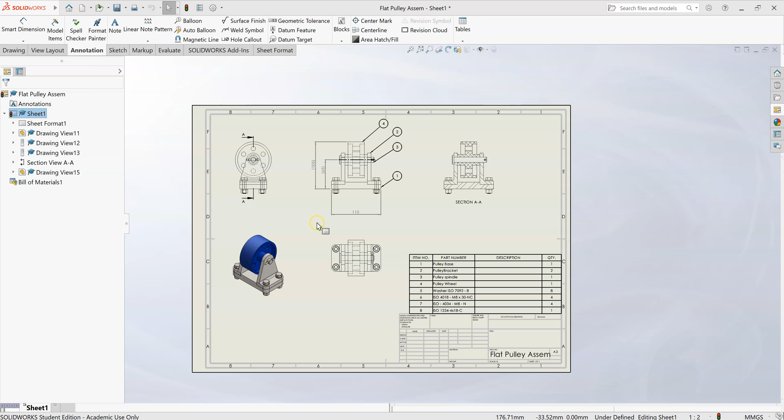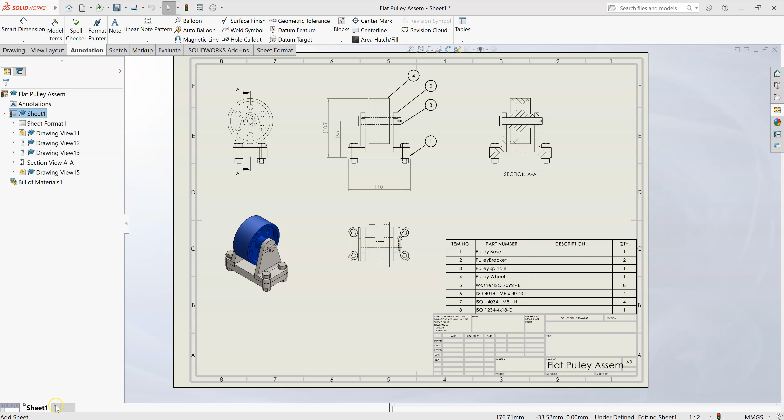So in this video I'm going to create a new drawing sheet within the same drawing file. This time I'm going to do a single one of the parts here. So let's say, for example, the pulley base, if we take them in order. So down at the bottom here I'm going to click on create a new sheet.

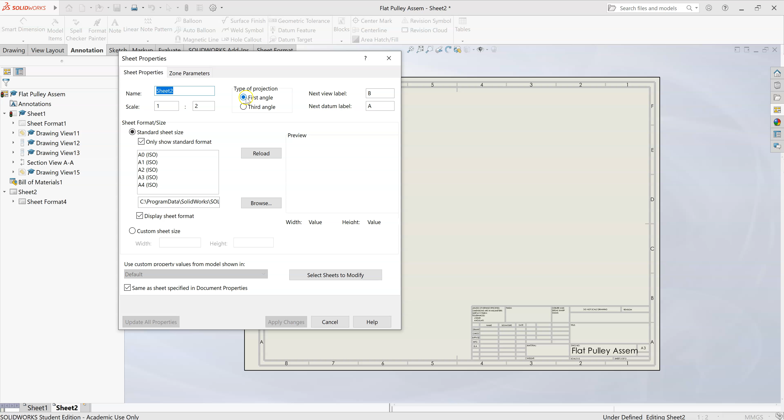Okay, it opens up a new blank sheet with the same format and same properties as sheet 1. So it'll take whatever the properties you set up for sheet 1 and create a new copy of that essentially. So if we right click here, we can look at the sheet properties. See, it's using the same template as before, and it's still in first angle projection because we set that last time.

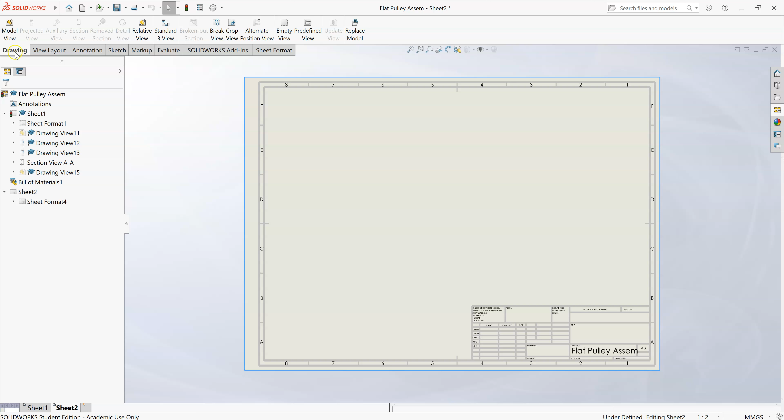Okay, so in this sheet here, what I'm going to do is I'm going to import three views of a particular part. So if I go back to the drawing tab back here, same basic procedure that we used before. I can import a model view of an existing part, so the pulley base, spindle, wheel or bracket, and I can import a single view and then project views from that.

Or alternatively, I could come across here to the right hand side and go to View Palette. I need to refresh that. And here it's still looking at the same model, the assembly model that I had before, so I can change that. This little drop down here, I can go to Pulley Base, for example. And we have my front view, top view, right view, etc. So I could drag a particular view from that onto the sheet and project from there.

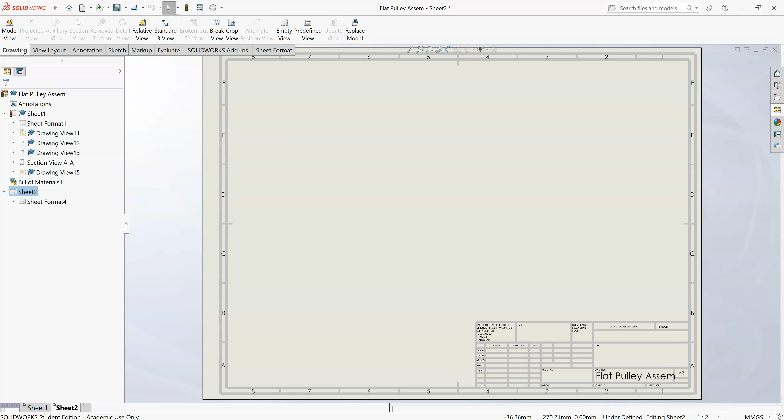Okay. But I'm just going to cancel out of that for the moment. So on the drawing tab here, if I go to the standard 3 view, that should take, depending on how I've created my model, that should give me a plan, elevation and end view of my part.

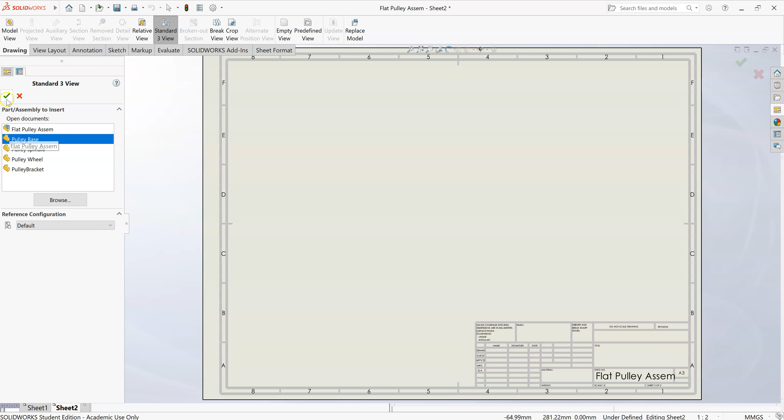So standard 3 view of that part, and click OK, and it's put in a plan, elevation and end view of that pulley part in first angle projection. So this is the front elevation, and looking from above we see the plan below.

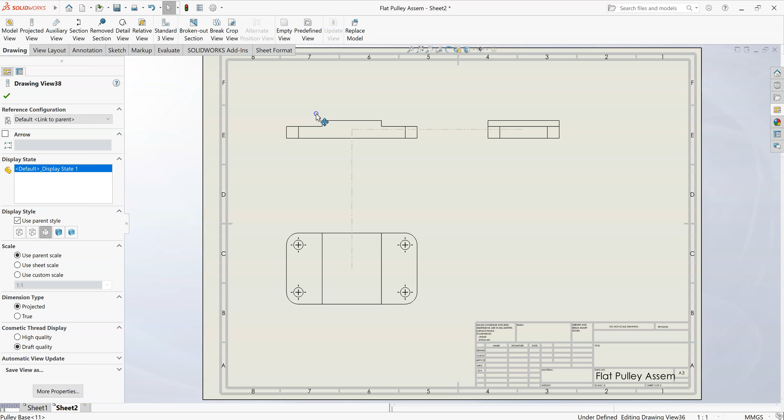Okay, so I'm going to select the parent view, so the front elevation in this case, and change the display style of that to hidden lines visible. You see these holes now appear in this view, but also in this view here as well, because this is a child view of the first one.

Okay, so you can rearrange those views as needed then. If you move the parent view, the other views move with it. If you move one of the child views, they just move independently. Okay, so those are the 3 views that I want. A couple of different methods, as I say.

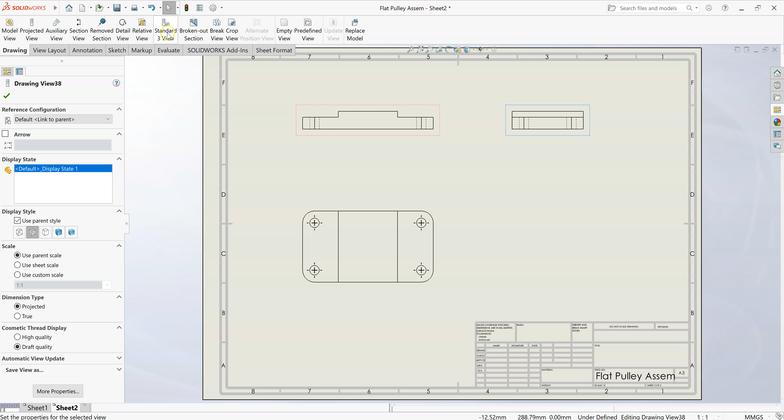You could use the standard 3 view, depending on how you've modeled it when you're modeling the part. It'll essentially take what's on the front plane as being the front elevation. So for the bracket part, for example, I modeled the bracket part on the right plane. So using the standard 3 view method wouldn't really work for me in that case. Okay, so if you're happy enough with the views as they've put in, it puts in plan, elevation, and end view.

Solidworks will generally put in center marks for you on holes. Now it may not always put in a center mark. Let's say if you just have a fillet or a curve and you want to have a center mark for the curve, it may not always put them in. So you can put in a center mark on any curve or on any circle or any hole. You can manually put that in on the annotation tab over here. So we'll do that next.

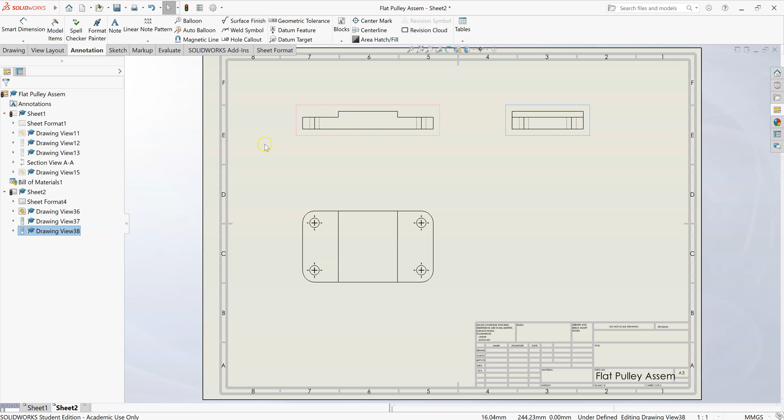This is generally what I would do, is put in my views, and then I'd look to see are there any center lines or center marks that are missing from those views, and then add them in that way. So if I go to the annotation tab, I could put in a center mark here if it was missing from a curve, or I could put in a center line if it's missing from a hole.

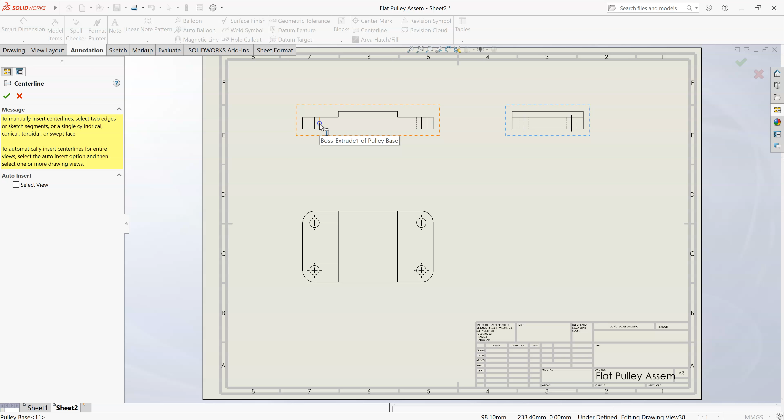So let's say if I wanted to put in a center line here on these holes, what you do is click on the center line, and then you select the two edges. So this edge, and it should place, yeah, there we go, it'll place the center line down through those, extending a little bit beyond them as well, as you can see there. And it has actually placed them on this view for me as well.

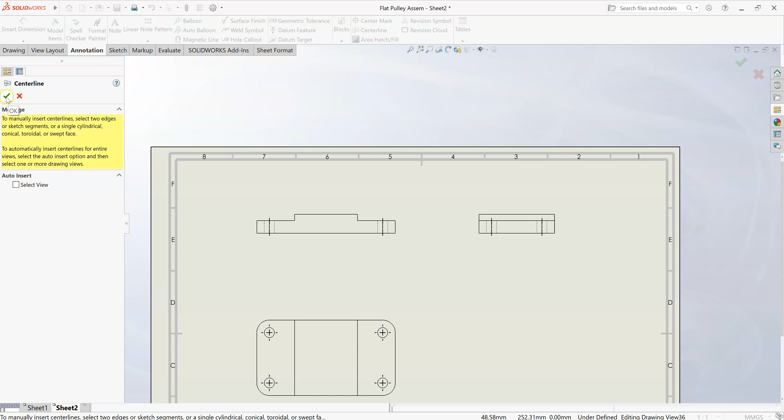Okay, so those are the center lines there. Now depending, you may want to have a center line down through the middle of the part as well to indicate symmetry.

I'll maybe look at that again after I've put in the dimensions. Okay, so having my three views, I've done my center lines and center marks. The next thing I want to look at is dimensioning. Again, on the annotation tab up here, we saw in the previous video you can use the Smart Dimension tool to manually add in dimensions.

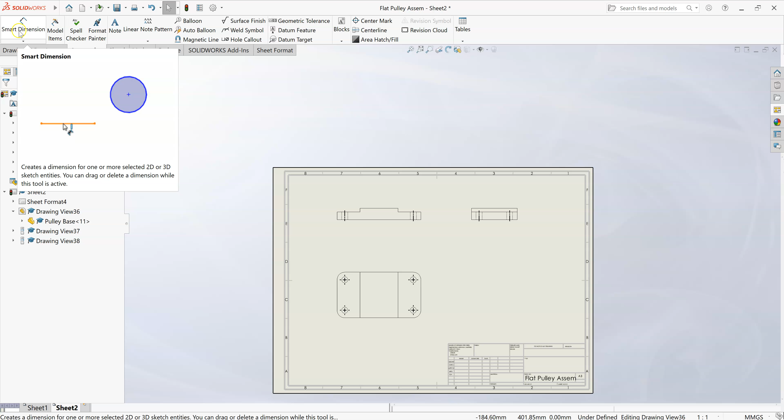You can do that to manually add dimensions, but in many cases you're better off to use the model items. What the model items does is it'll pull the dimensions to place in your 2D drawing. It'll pull the dimensions from your 3D model. So if I go back to the Pulley base part here, my 3D model of that part.

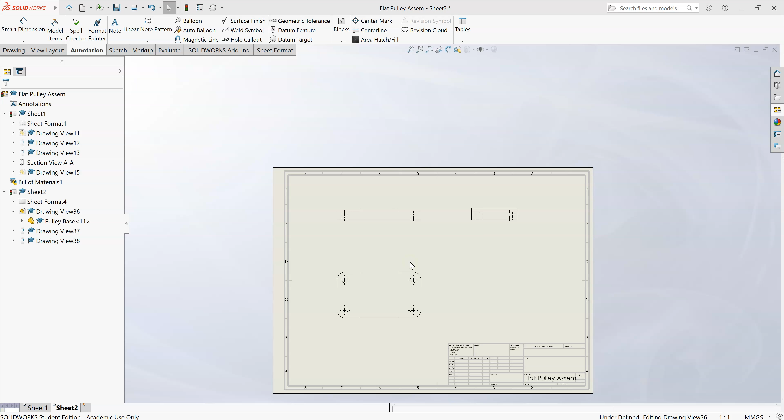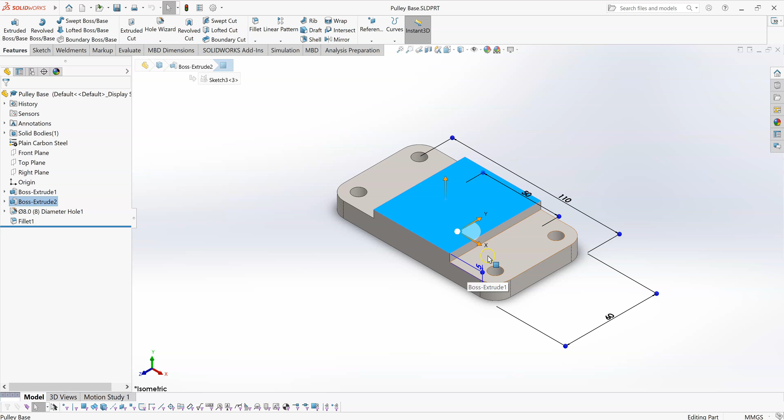Okay, if I click on that, it should show me, say for this feature, this boss here on the top of the part, if I click on that boss, it'll show me the dimensions that went into creating that feature. So this 50 millimeters, the 110, the 60, and the 5 up from that surface. This boss extrude 2 has drawn its dimensions from sketch 3.

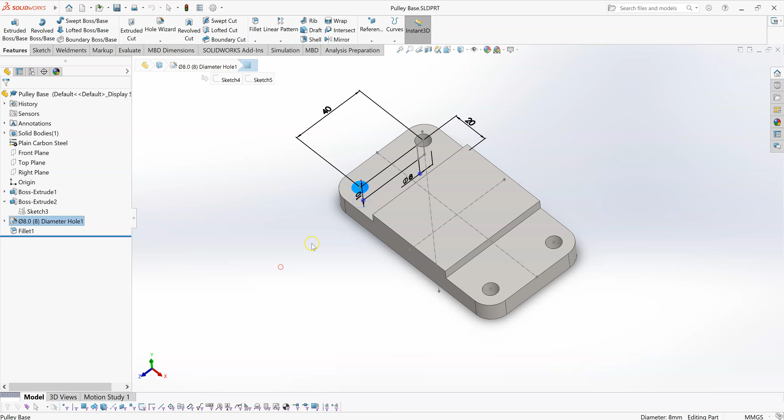If I click on one of these holes, for example here, the dimensions that went into generating that hole are the 40 center to center, 20 out from this shoulder or step here, and the diameter 8 on the hole itself, and also the 10, which is the depth of that feature, or the depth of that body that it's cutting through. So each one of these features in your model has a certain set of dimensions associated with it. If I click on a fillet over here, for example, it just gives me the radius, and that's kind of it for this fairly simple part.

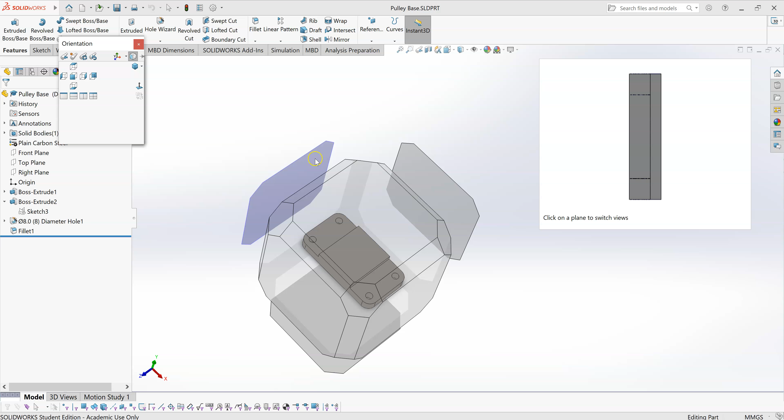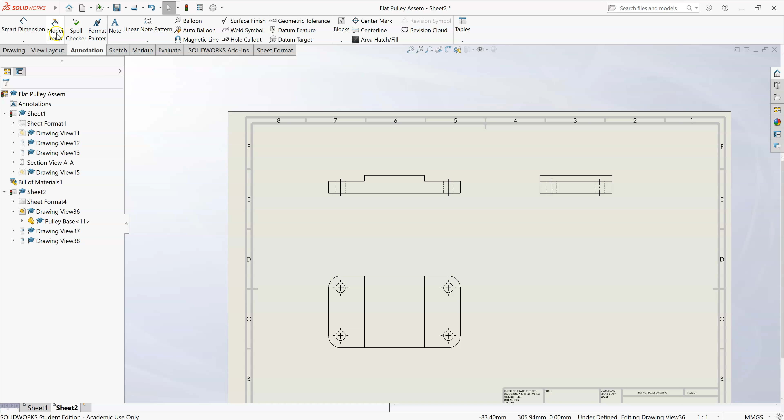Okay, so having said that, if we go back now and look at our 2D drawing, just cancel that and go back. Bearing in mind that the geometry it's drawing this 2D drawing from has a set of dimensions associated with it, that's what the model items here refers to. If I click on model items, it'll allow you to import those dimensions from your 3D model directly into your 2D drawing.

And you can do that feature by feature, or you can do it for the entire model. Now what I would recommend is that you do it feature by feature. I'll do this once for the entire model just to show you. It'll put in every dimension that was used in your 3D part file, all at once. Sometimes that works out okay. For a more complex part, it can get quite messy.

So I'm going to undo that. What I would typically recommend is you do your model items feature by feature. So click on selected feature. If you want to specify that the dimensions go into this elevation here rather than the plan, you can uncheck the box for import items into all views, or you can leave that checked if you want.

Let's say I want to import the dimensions that went into making this 50 millimeter boss here. If I click on that feature, it puts in 50 millimeters, 5 millimeters height for it, and also the 60 and the 110. Now you can see it's put those into two different views. It's put the 110 into my elevation and the 60 into my plan. I might prefer to have the 110 here on the plan, for example.

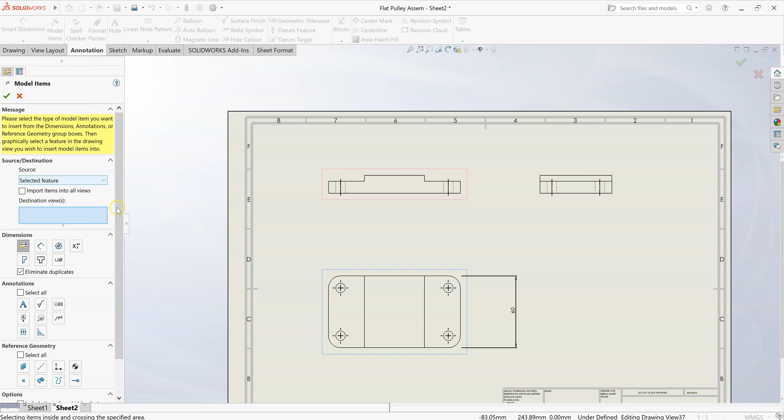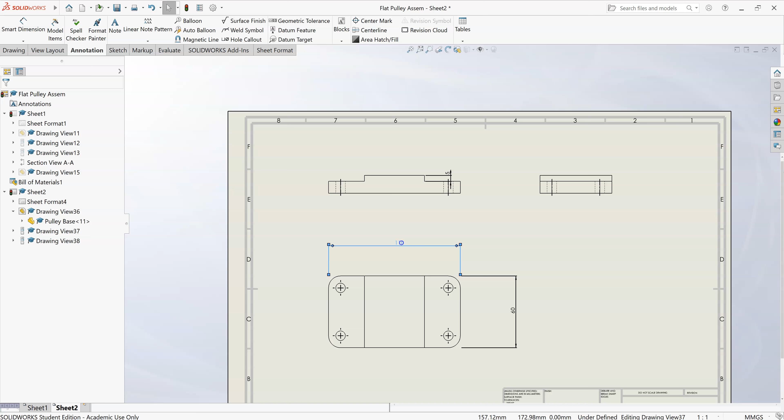So if I cancel that, go into model items again, do selected feature, and uncheck the box for import items into all views. Let's say I select this line here, see it's put all those dimensions just into this plan view. Now if I click on this up here, you can manually delete an individual dimension if you want to.

If I go into model items again and click on this line up here, now I can get the 50 millimeters up here and have the 110 millimeters down here. So you can play around with it a little bit, experiment with this import items into all views command, and manually try and force it to put particular dimensions into particular views. It'll take a bit of trial and error sometimes. So that's the 50 millimeters, and also the overall dimensions of the plan, the 110 by 60.

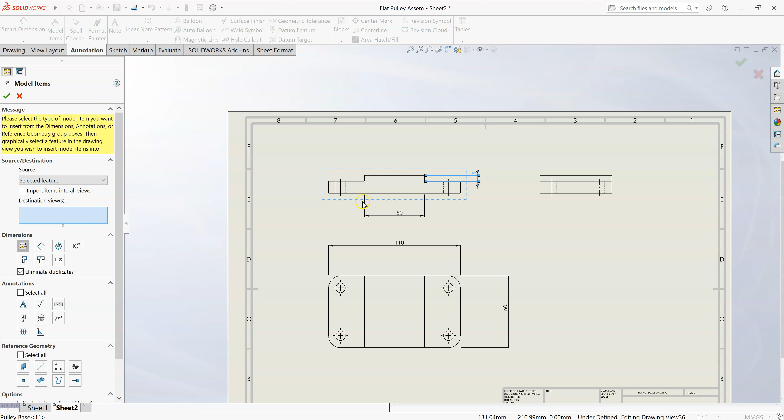Once the dimensions are in, you can drag them around, resize them, move them into a suitable location. So we have the dimensions in for the main geometry. We don't have any dimensions for the holes yet. If I go to model items again to import the dimensions for these holes, I'm just going to click on the entire model and click OK. You can see it hasn't actually imported any dimensions for the holes. It has put in this dimension here for the fillet radius, for example.

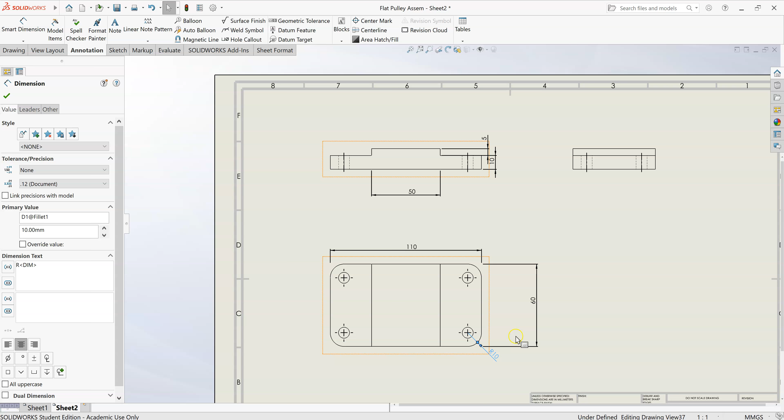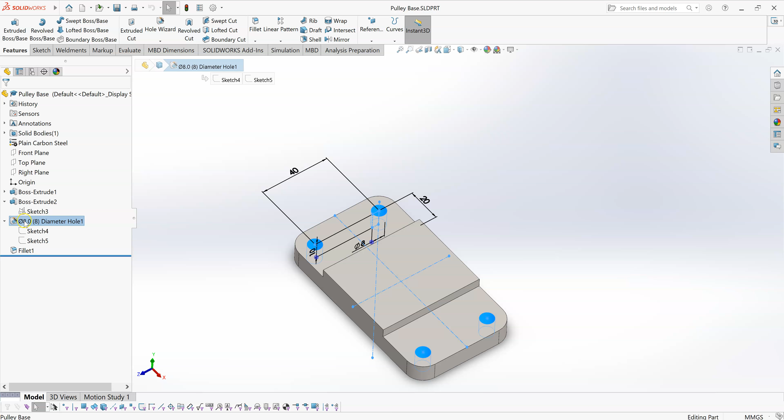But if I go to model items and import, it hasn't automatically picked up these dimensions that went into creating these holes. And the reason for that is, if I go back and look at my model here, just cancel out of this tab first, and I'll go back and look at the model. The way I created those holes in the model was using the hole wizard. So you can see this feature here in my feature tree is the hole wizard.

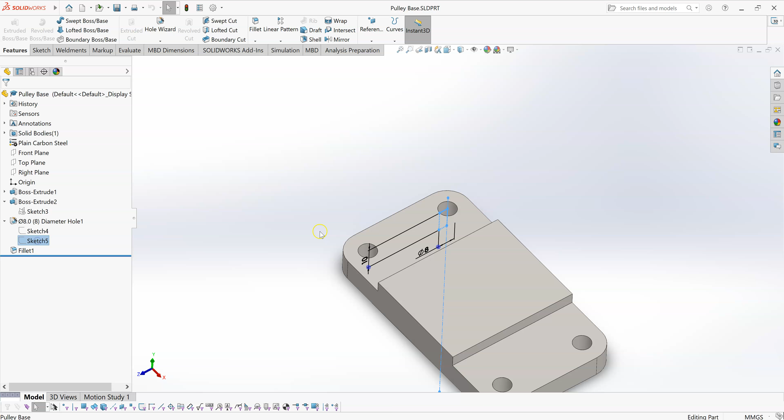And the way the hole wizard creates those holes is you create a sketch within the hole wizard dialog, and essentially what it does is it places in 4 points, or however many points, to represent the center of those holes. See these blue points here. It creates one sketch for those locations for the holes, and a separate sketch then for the profile of the hole. In this case they're just plain holes, so it just creates a revolved cut feature, and that's the profile of the revolved cut. So sketch 4 and sketch 5 there are the location of the holes and the profile of the holes.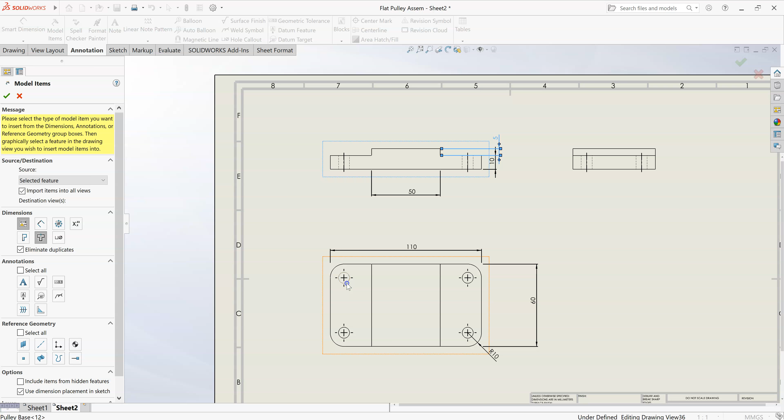So you'll see here on the next section down in the model items dialog, we have a few options. We have one here for hole wizard profiles and one here for hole wizard locations. So the hole wizard locations here would be those 4 points at the center of those holes. So that's what we need to import, the dimensions to the center points of those 4 holes. So I should be able to import. There we go. I should be able to import the information relating to the location of those holes.

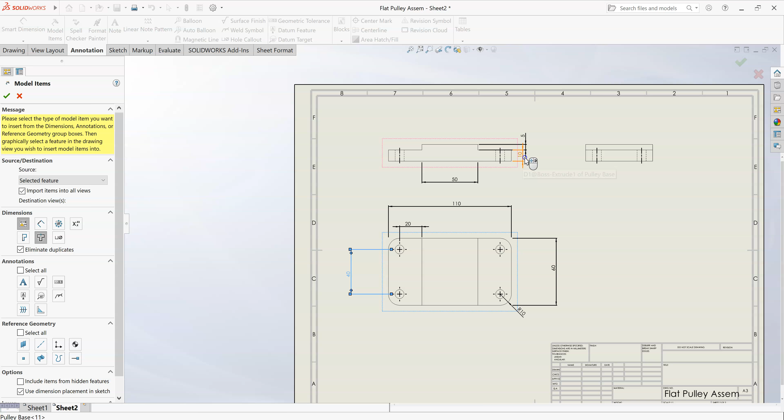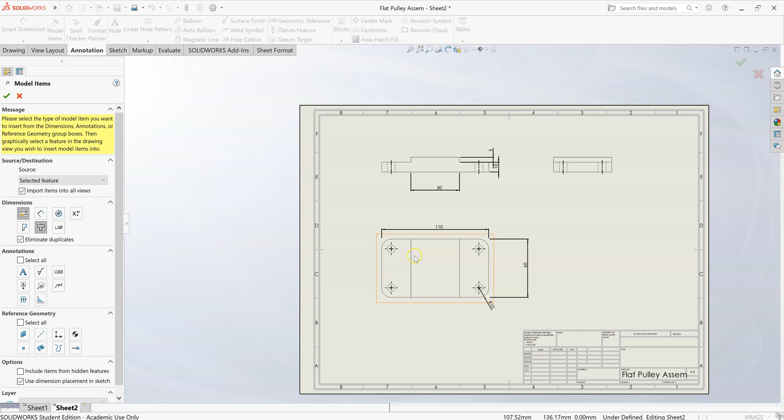And I think that is more or less all of the information we need for that. We have the overall height of this boss plus the 5 millimeters for this one, and I think that is more or less it for the dimensions. Now the fillet radius here, you see there's only one of the fillets dimensioned. Excuse me, I cancelled out of that without keeping those dimensions. So I think dimension-wise that's more or less it. You could tidy them up a little bit more, but the video is getting on a bit.

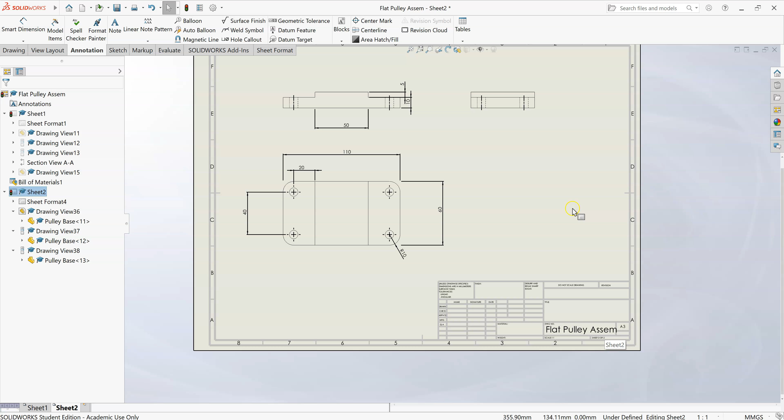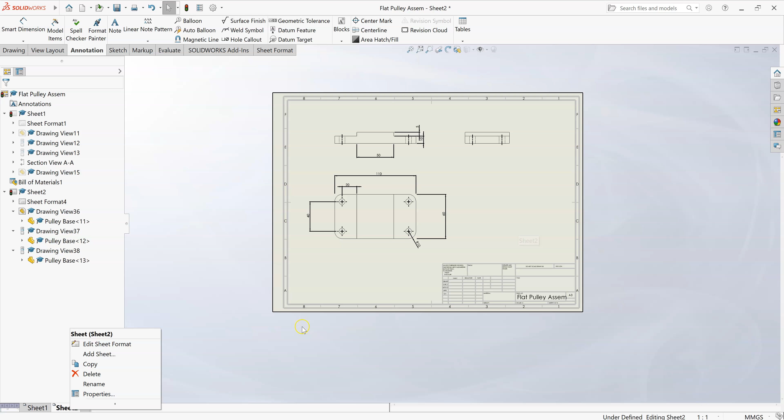I wanted to spend a little bit of time looking at this title block down here as well. So the title block within SolidWorks, you could think of it as being like a separate layer in your drawing. So the borders and the title block and any of the text populating the title block are saved within what's known as the sheet format. To access that sheet format, you can right click somewhere on the drawing background, or you can right click on the sheet information over here, or I believe down here as well. And in any of those locations, just click on edit sheet format.

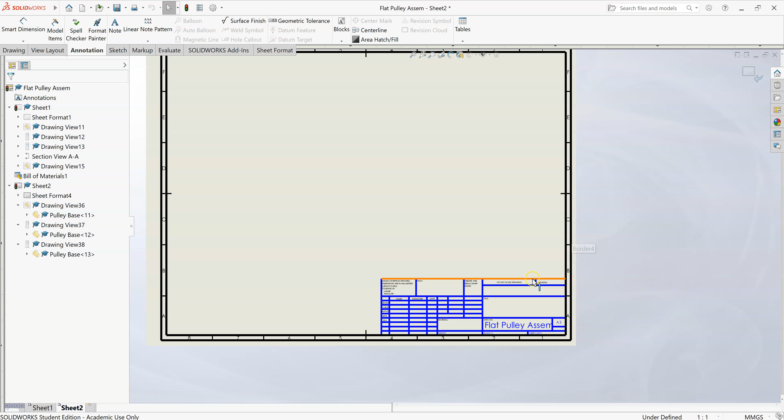Your drawing disappears temporarily. It is still there in the background, but you're essentially now operating on a different layer of your drawing file. You can edit your title blocks, your borders, and also the text that goes in here. So when you're within the sheet format, you have access to modify the text boxes, or the text that goes into these here. So you can modify, let's say, where it says title here. If you double click on that word title, you can change it to drawing name or something like that.

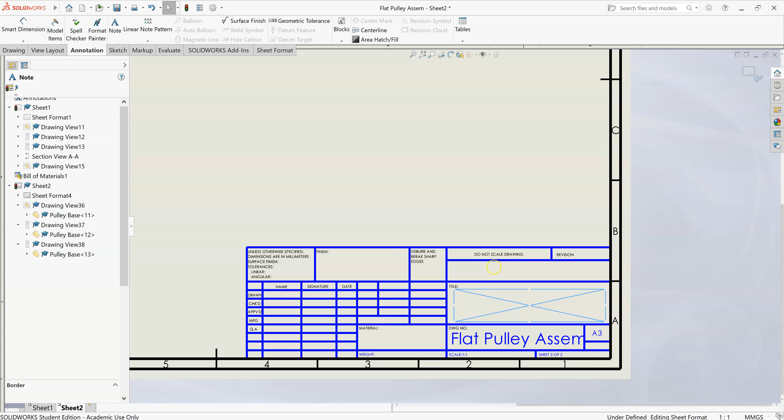But also there's a hidden text box here. So if you click on that text box, you can see the properties for it on the left hand side, and if you double click on it, you can get in and manually change the text in there, type in something that you want. That same goes for most of these over here.

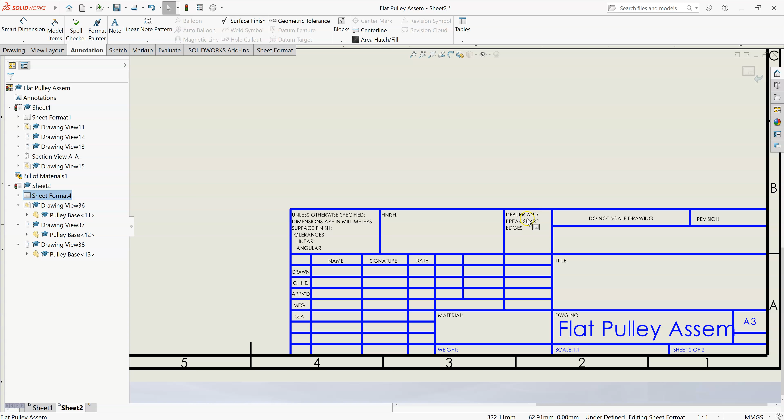If we look at the drawn by section here, if you click in the center of that box, there is an invisible text box in there, and if you hover your mouse over that, you see this $PRP drawn by. What that's saying is that this text box will be automatically populated by a property. So the $PRP means there's a property called drawn by that will automatically fill in that text box. So some of these text boxes are linked to a property in the background of your drawing. This title one, if I hover over that, you see that's linked to a property called description.

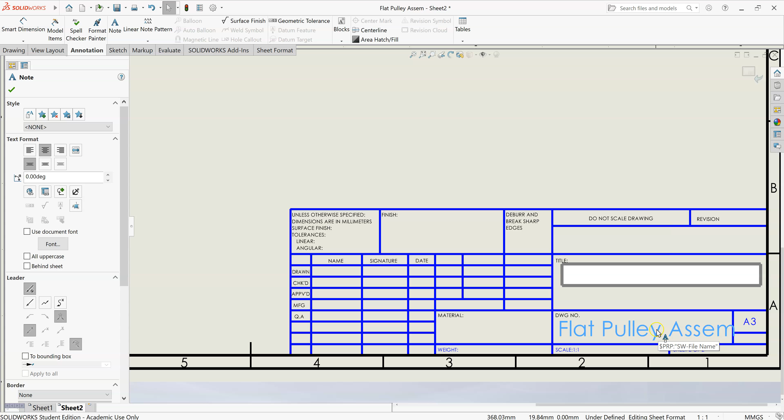This drawing number here, that has been automatically filled in, that's linked to the file name. Now that's the file name of the drawing file here. So you see flat pulley assembly sheet 2. That's flat pulley assembly is the file name of the 2D drawing file, not the model that goes into it.

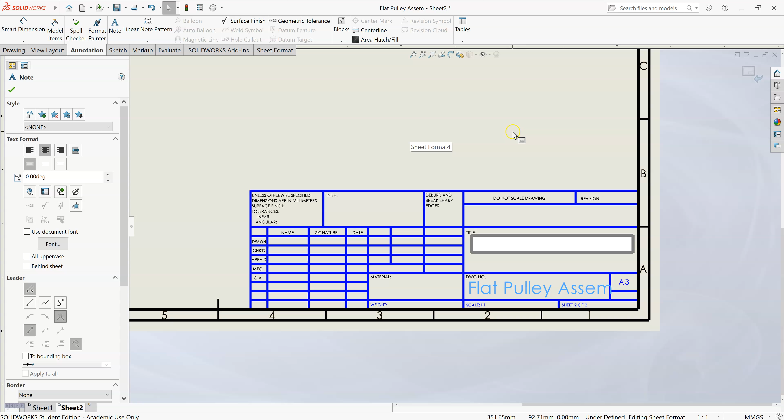Some of these other ones here, so the sheet 2 of 2, that's again linked to a property. The scale here is linked to a property, and so on. Now you can manually link something to a particular property if you want to, or you can create your own properties if you want to. But let's say if this title here is linked to a property called description, drawn, this box here under name is linked to a property called drawn by.

So what we can do is we can modify the drawn by property to put your name into it, for example, and that will automatically put your name into that box then. So where you find a lot of these properties is if you go up to the top here, go to File, and go to Properties. So these are your document properties. You see here you have the Summary tab and a Custom tab. So in Summary tab you have the author, keywords, comments, title, and subject.

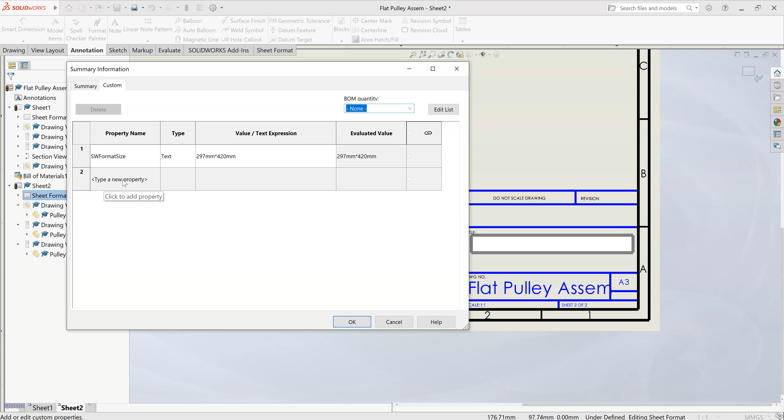In the Custom tab over here then you can create a new property. Let's say if you wanted to create a new property called, for example, student number. Okay, and you could give that a value then. The value for the property student number would be A0012345 or whatever your student number is. So you can create a new property that way.

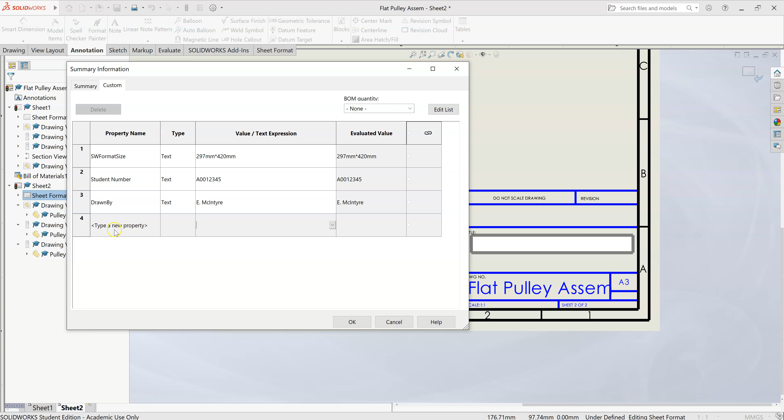Or the other thing that you can do is you can modify an existing property. So let's say we have an existing property called drawn by. Okay, and the value for drawn by, we can give that a value of your name. Okay, so if I click OK on that now, you'll see that because I've modified the property drawn by to be my name, any text box that's linked to the property drawn by will change to E. McIntyre.

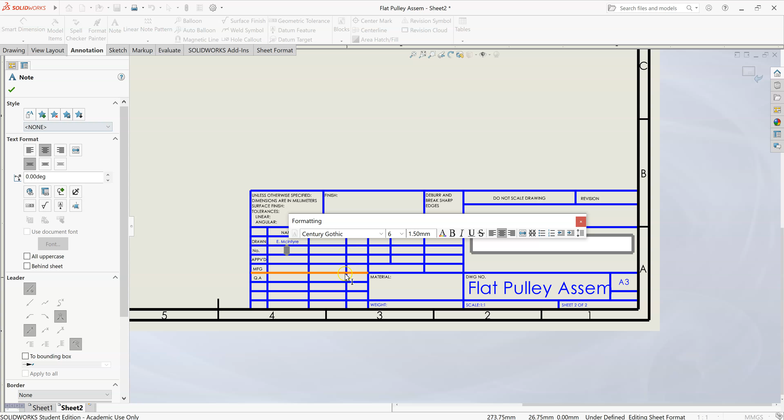I could do something similar. Let's say if instead of checked here, I could put in my student number. So let's say if I double click into this checked text box here, and I'll just change that to number. Okay, so there's a text box in here, and I'm going to link that to the property that I've created already. So with that text box selected, over here on the left hand side you see we have hyperlink and link to property. So link to property is the one I want here.

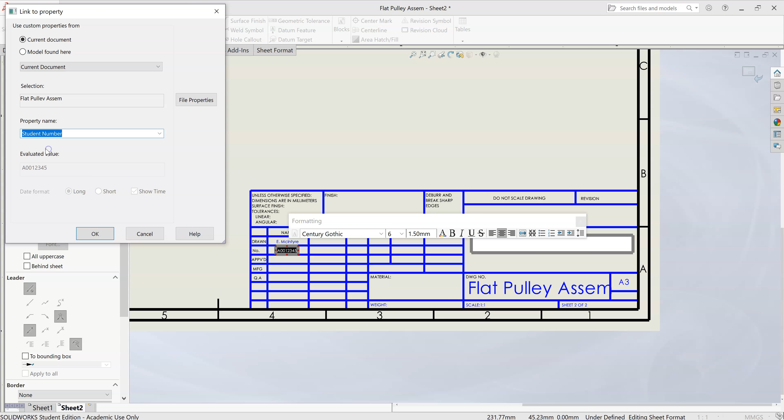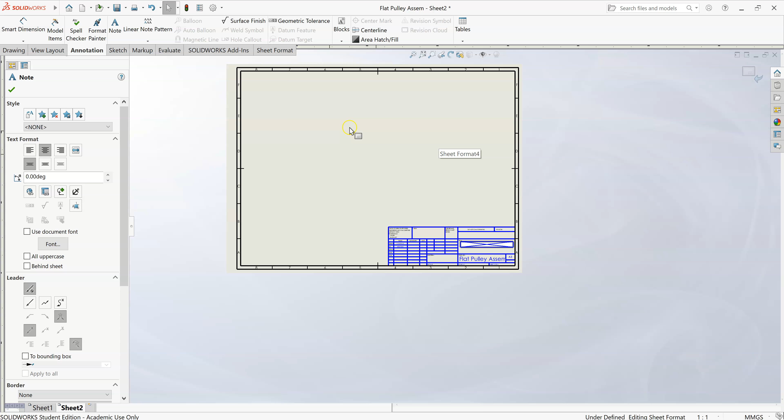So I can link the contents of that text box to a property called student number. So that's the one I just created there. And you see that gets populated then with A0012345. I could probably do something similar here where I link this to the property of the file name of the model or something like that. But for something like this where we have maybe 3 or 4 sheets or 4 or 5 sheets or whatever it is, it'd probably be as easy just to type that in myself. So I'm going to type just Pulley base in here.

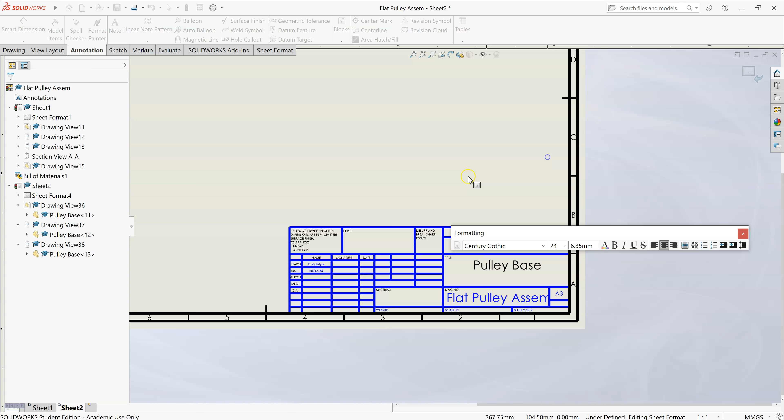Okay, so when you've modified the title block to your liking, go up here to the top right hand side to accept the changes to that, and you should get back then to your drawing view with your parts and your dimensions and so on. Okay, so I think that video has gone on long enough. I'm going to leave it at that now, but you continue that process then. So you have your assembly view with your section, and then a separate sheet for each one of the individual components.

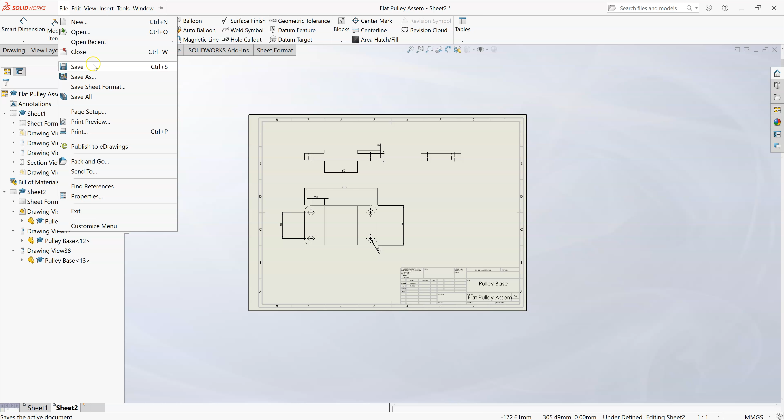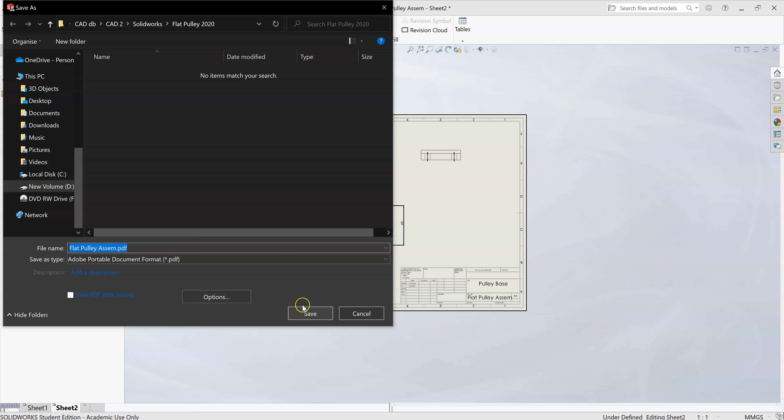Now one other last thing that I want to just talk about before I wrap up the video is saving this. So you can save this then as a drawing file, SLDDRW file. The other thing that you can do though is to export a PDF of that. So if you go to Save As, I think. If you go to Save As and you change the file type, Save As type, you can save that as a PDF file, and it should save it as a multi-page PDF file.

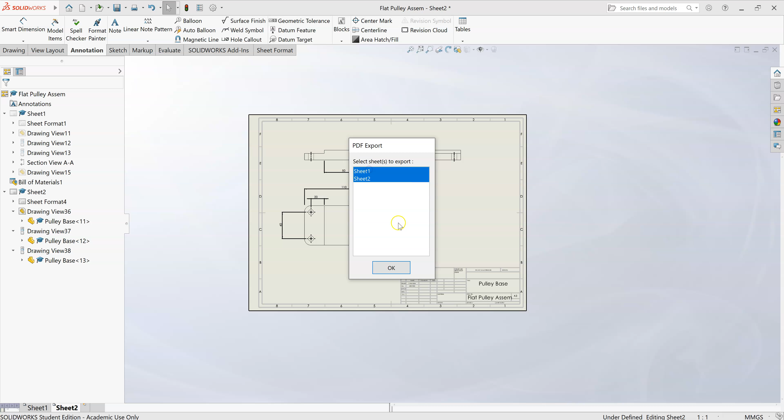Not sure where I saved that to. Oh yeah, sorry. So PDF export here, it asks you then. So let's say you have 5 sheets or 6 sheets or whatever it is in your drawing file. It'll ask you to select which one of those sheets, or if you want multiple sheets, you can highlight multiple here, and it'll create a multi-page PDF then with all of those sheets in it.

Okay, so when you're done, you have all of these here, all your sheets and all your part files done. Save a copy of your drawing file, but also save a multi-page PDF of all of them together. Okay, I'll finish up the video at that then.